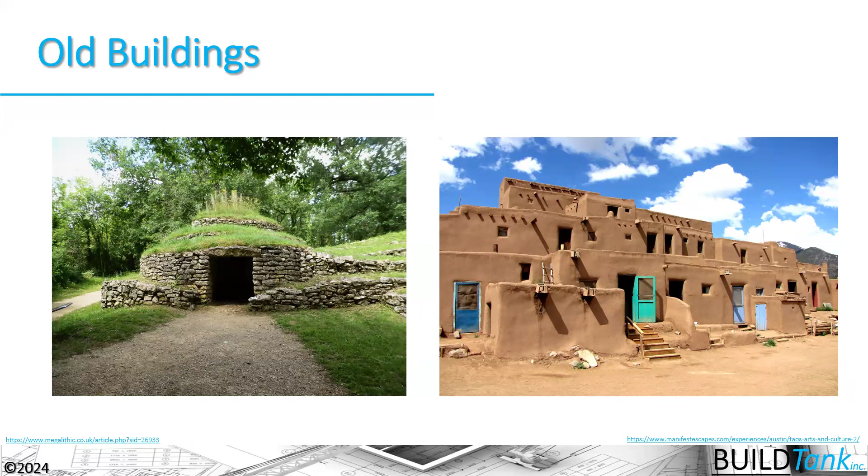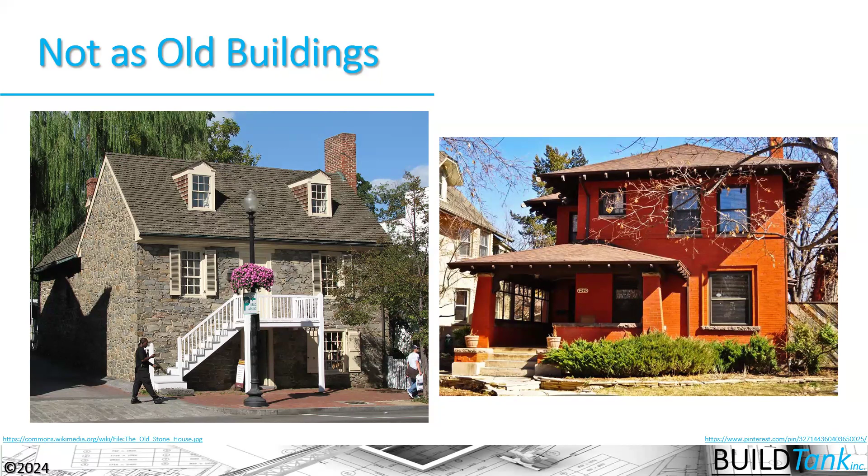And then we transitioned into wood-based construction in the early 1800s, or mid to late 1800s. And once we got to wood-based construction or wood frame construction, we see that things haven't changed that much in terms of the way that we're actually building or the materials that we're using. We moved away from balloon framing to platform framing, but the big thing that's changed is the number of people that are touching our modern day houses.

And that's one of the big reasons why we need to understand building science more and more.

A NAHB study done in 2020 showed that over 300 people are touching a modern day house. Each of those people is segmented into a specific category of what they're doing in that house.

With one builder, we named that person a builder, a superintendent, or a construction manager, who in theory understands how to take that house from foundation all the way through finished carpentry.

So it's really not that difficult to understand why we have some problems with our houses, because we're not thinking about the totality of the house.

We're thinking about just that little segment that we're doing in terms of trade people in that house. And we generally have one person, that construction manager, trying to understand the totality of the process.

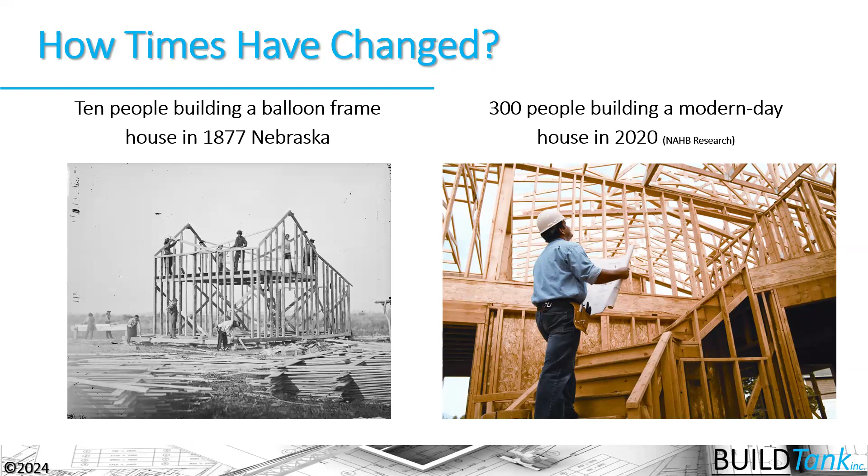So when we're looking at these older houses, we need to ask ourselves, why is this house a 100-year-old house? Why has the Taos Pueblo lasted for over 1,000 years? Often they're drafty, they're uncomfortable, yet they're incredibly durable. Their houses have lasted over time.

And really the main reason for that, and the reason our houses aren't performing as well as they did in the past from a durability perspective, is that our expectations of our houses have changed pretty dramatically.

This 100-year-old house, just because it's drafty and uncomfortable, can be incredibly durable because it has tremendous drying potential. Water is the thing that's going to destroy houses over time.

So we really need to understand the physics of water, and the physics of how air, vapor, bulk water, and energy in terms of heat flow move through our houses.

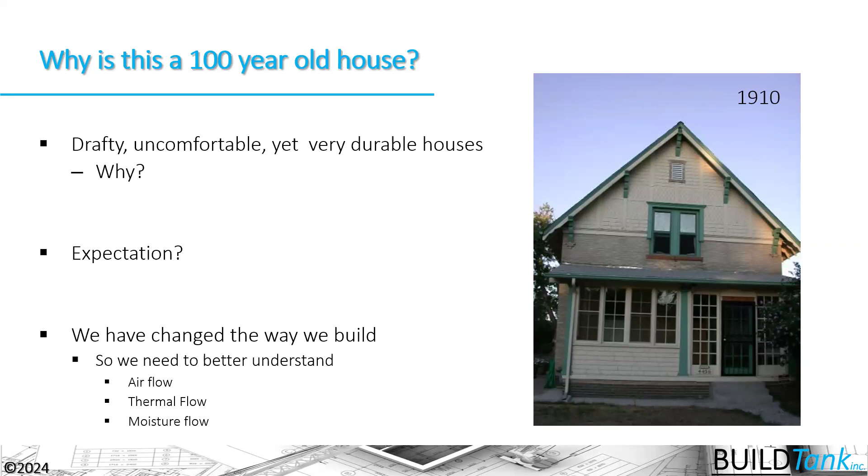So that we can gain control and predictability of the airflow, thermal flow, and moisture flow in our houses. This house is so durable because it's so air leaky, so uncomfortable -- it has the ability to dry if it gets wet.

Now, these expectations are changing whole neighborhoods, whole cities. Older houses are being scraped, new houses are being built, but are we actually meeting people's expectations?

And really, you see the genesis of the code development cycles changing time and time again, because they're trying to achieve the expectations that people have of our houses.

Some simple expectations we can think of, with regards to those changes: take this 1910 house and think about what comfort meant in 1910. Our notion of comfort was quite different.

For example, people were willing to put on a sweater in the wintertime. They might have actually had to do some work in the winter, shoveling coal to heat that house. In the 2020s now, we really want to be able to walk around from room to room and floor to floor and be quote unquote comfortable.

And we want to actually be able to do that in our underwear, let alone having to put on a sweater inside our house to maintain comfort.

Those expectations have fundamentally changed the way that we build our houses, and therefore we have to understand the building science so that we continue to have long-term durability in our homes.

So some of the modern expectations: yeah, we still need that structural integrity. We want fire integrity. We want durable structures. We want healthy environments. We want that comfort.

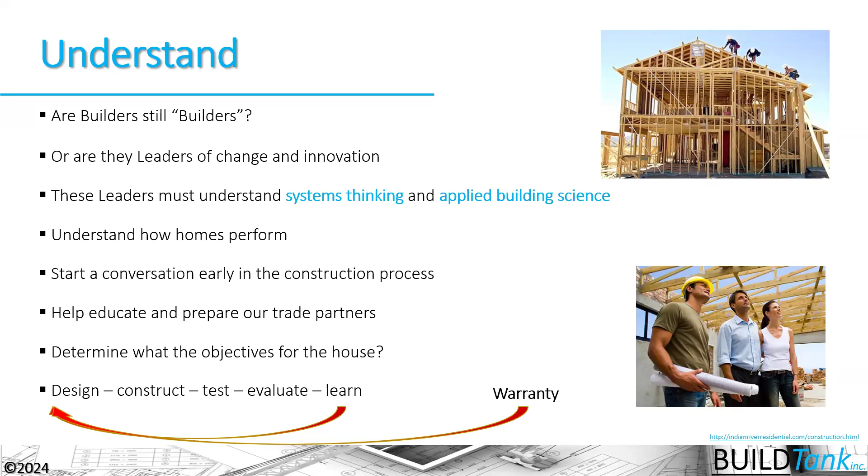We can learn a lot from warranty to change the way that we design and construct so that we do better meet those expectations. But ultimately, what we're talking about is how do we understand the basic building science and how do we apply it in the field to get houses that actually perform.

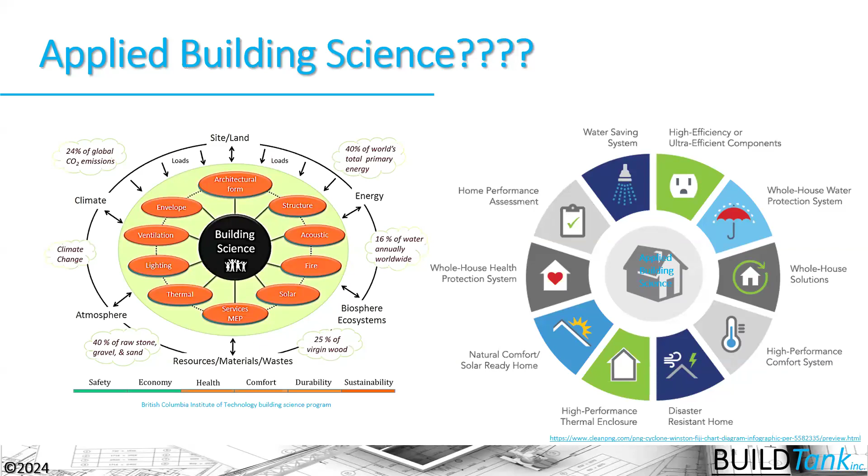Because there's so much here that we need to integrate together. And if we boil this down into a little bit less and talk about the fundamentals, we're talking about how air flows in our house, how heat flows in our house, and how moisture flows in our house, and how do we gain control and predictability of those things so that we get houses that are not only durable, those 100-year-old houses again, but houses that meet the core expectations of the people living in those houses.

We've coined a term recently about high performance buildings. And this diagram here kind of talks about what we're trying to accomplish when we have a highly performing building, a building that is comfortable, healthy, durable, and efficient. And I think we can add the term resiliency as well in our modern world.

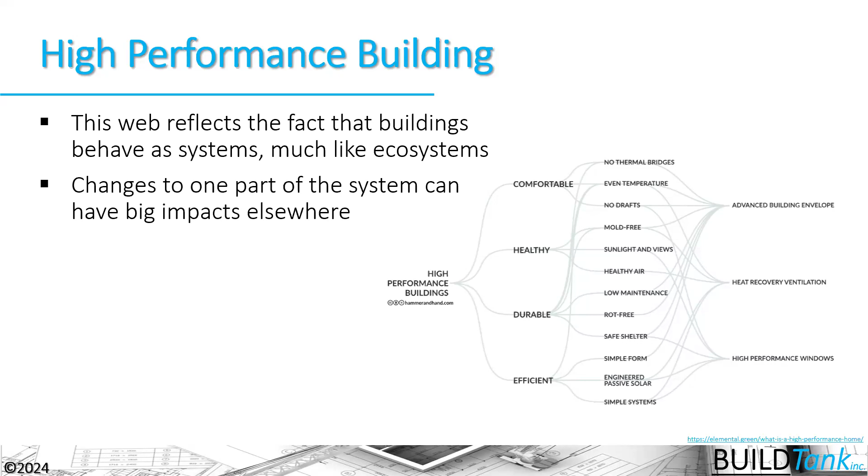After the last fires that we've had here locally in Colorado, we want to be fire resilient. And then the power outage that happened in Texas, we want to be able to reside in our homes over time. So we're seeing severe weather events and other events happening due to climate change and whatnot that are making us think about resiliency as well in this puzzle of things.

So systems thinking has been a key phrase maybe since the industrial revolution in terms of factory lines and production lines, but it's gained speed in housing as well within the last 30 or 40 years. And really the key term there when we think about systems thinking is not just moving from the specific framer or insulator and thinking in this more holistic approach, but understanding this word synergy, where two or more things come together to achieve something that's greater than what they could achieve on their own.

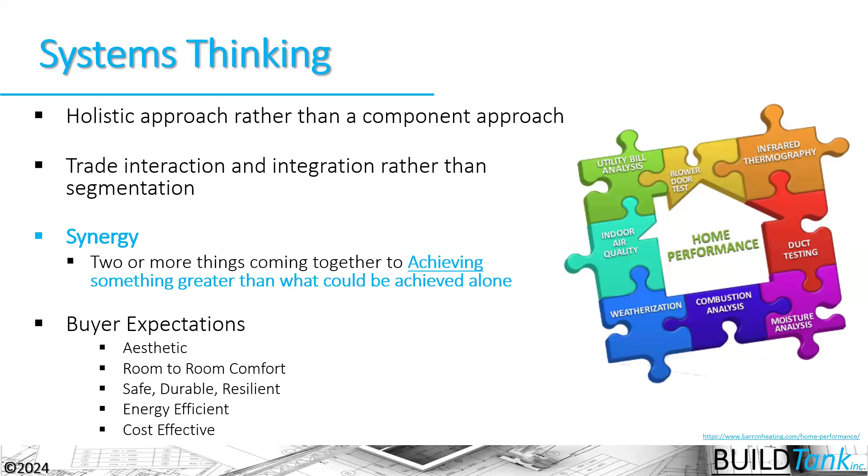So again, the only way to meet these buyers' expectations, the people that are actually living in our houses, is to understand the synergy between insulation and air barriers, between ventilation and house tightness, between moisture management and long-term durability. All of these things come together, and the systematic approach helps us do that. So two or more things coming together.

So we can think of it in a simple way as insulation and an air barrier coming together to control heat flow, especially when you have fibrous insulation and you're trying to control the air pockets inside that fiber. But in reality, when we bring insulation and air barriers together, we're getting more than just control of heat flow. We're also beginning to get more control of airflow in that house. And we're also getting more moisture flow control and predictability, and better and improved indoor air quality.

So just bringing those two things together, there's this synergistic relationship that is giving us 4 or 5 or 6 or other interactions there that are giving us these qualities, and helping us meet those expectations that people have in their houses.

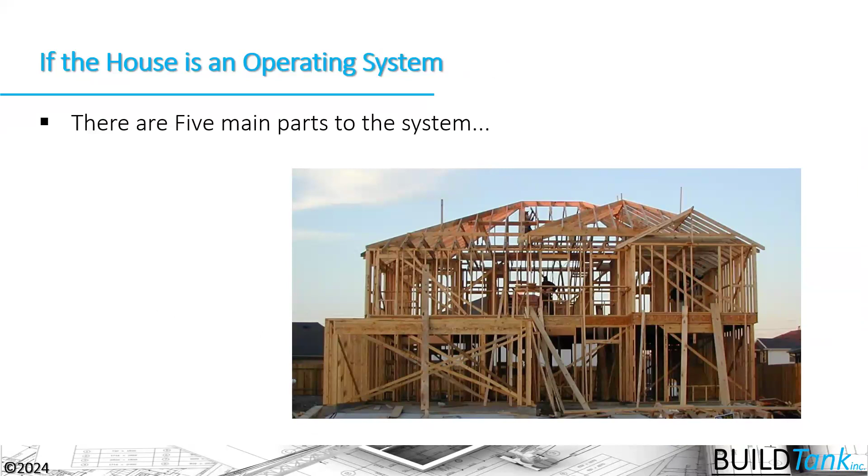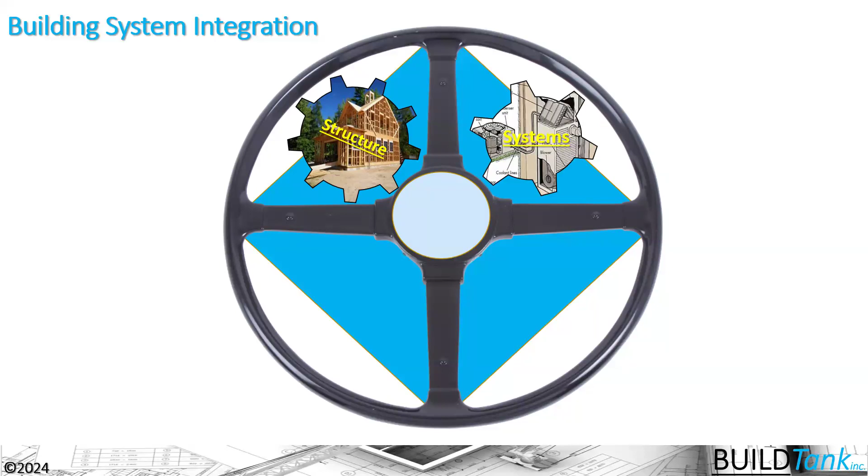So when we start digging in a little bit more, there are kind of these 5 main parts to the system that we need to address and understand the synergies that are happening with these systems. We have the basic structure of the house. We have the systems, the mechanical systems, the HVAC, the plumbing, the lighting systems in our houses. We have the enclosure of that house to control moisture and heat and energy moving through that enclosure. And then we have the specific climate that house is in.

And then we have this kind of wild card, the wild card being the people in that house. And we're going to take these different systems integrations here, and we're going to plop them into, again, that specific climate here. And that climate is defined by the IECC climate zone map here.

In Colorado, we're in dry climate zone B. You can see the dark line separating the dry climate zones from the moist climate zones. Colorado specifically has one of the largest varieties of climate zones within our state, from climate zone 4B to climate zone 7 and 8 up in Leadville and in our mountain areas.

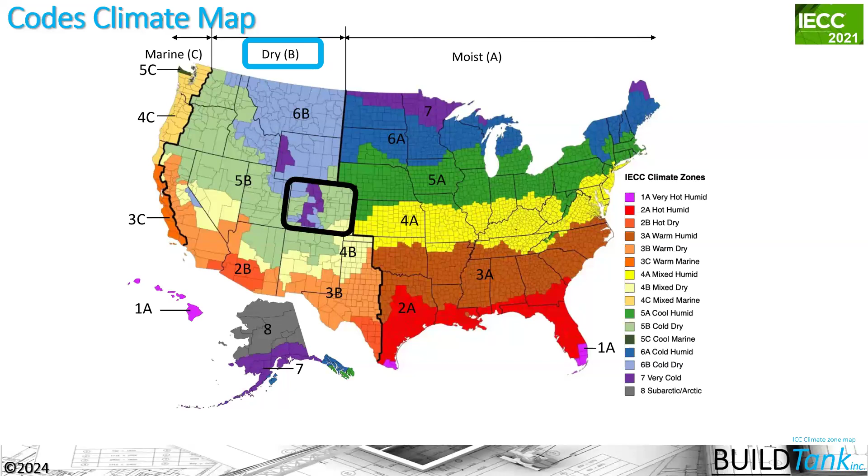But the majority of Colorado on the Front Range plains here is in climate zone 5B. We just have to recognize that because the code asks us to do things slightly different in climate zone 5B, the dry climate zone, versus 5A, the moist climate zone. So we need to understand the building science and how we're going to apply that building science on these homes.

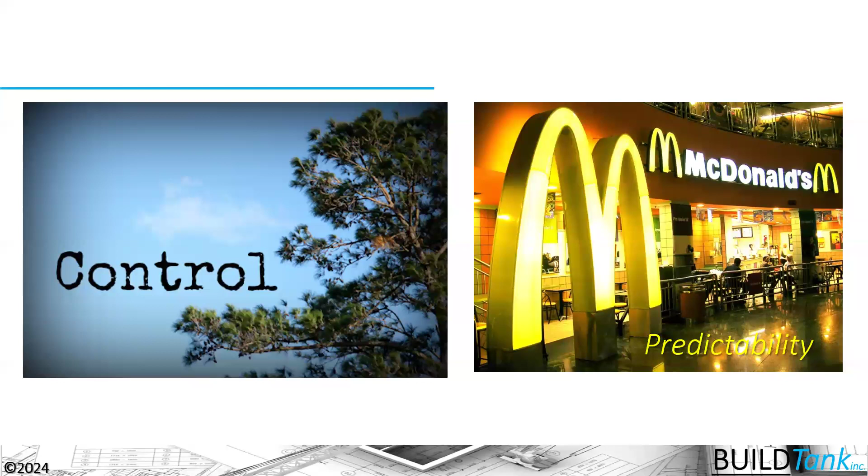So it ultimately comes down, when we're talking about building science, to gaining control of airflow, moisture flow, and thermal flow, and also gaining predictability. I like to use McDonald's as a meme for predictability, because if I'm in Paris, France, or Los Angeles, or Denver, Colorado, and I get a Big Mac, I know exactly what I'm going to get in any of those locations, and how I'm going to feel afterwards. It's so predictable that that's what we want to translate into our homes, gaining that control and predictability throughout our houses—predictable performance, predictable flow of energy, predictable vapor management, and all those things.

Building science over the last several years has kind of consolidated all these concepts into understanding thermal flow, vapor flow, airflow, and bulk water management. Some people will put these in a different order, but I'm putting them in this order because that's kind of how they're addressed with regards to the energy code. So we're going to look at these different layers, but we're going to start with the intent of the IECC.

The intent statement of the IECC is important because if you break it into its three components, you can kind of see building science wrapped into them.

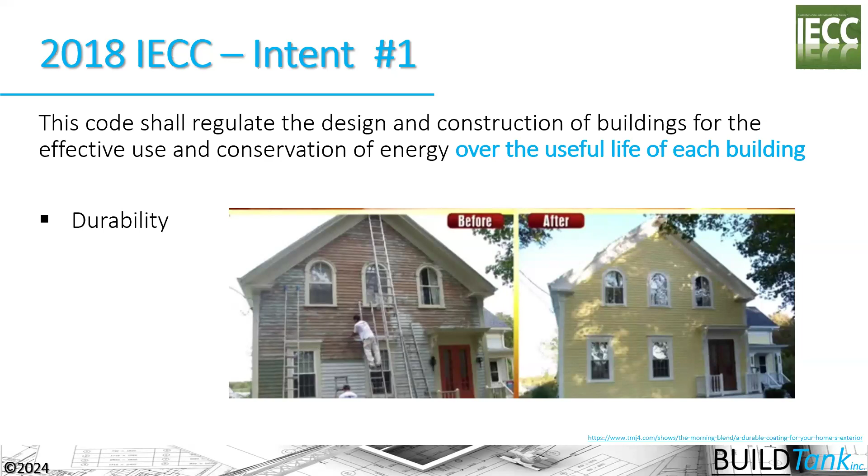The first part of the intent statement says that the code shall regulate the design and construction of buildings for the effective use and conservation of energy over the useful life of the building. It's really that section that's getting us to understand that the code is trying to ensure we have long-term durability in our houses. Now, obviously it's the energy code, so comfort is kind of implied, and energy efficiency and cost of operation are kind of implied in the intent statement, though not specifically talked about there.

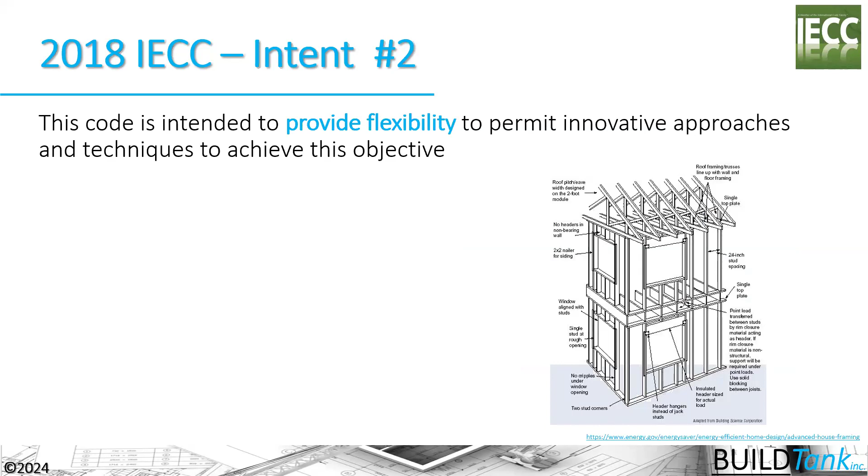The second part of the intent statement says this code is intended to provide flexibility to permit innovative approaches and techniques to achieve this objective. The big part here is to provide flexibility. I like to equate this to a statement from the Dalai Lama, where he says we need to learn the rules so that we know how to break them properly. In that way, it's telling me that we need to dive into the language of the code book itself, because it's giving us tons of options. It's not saying we have to do things in one way, but that we need to do things in a variety of different ways to achieve one result.

The result being a house that meets the intent of the code, that has a quantifiable amount of energy use in that house if it's built to that specific code. And we should have a quantifiable amount of performance in that house from a comfort perspective, a durability perspective, and so forth.

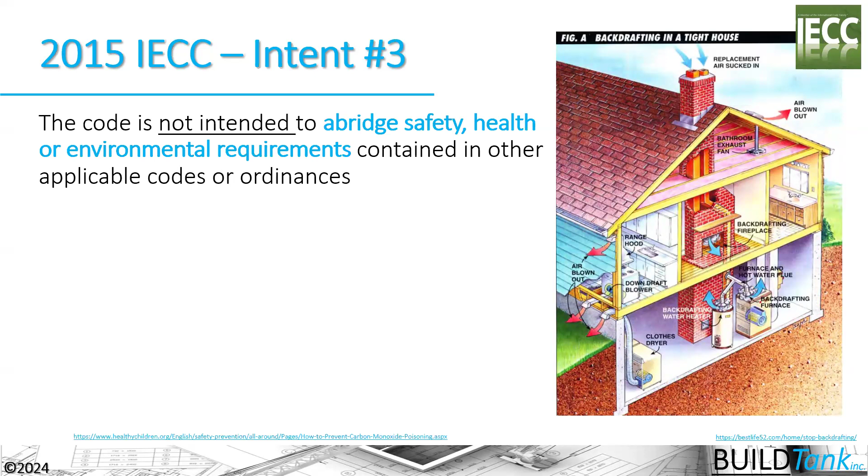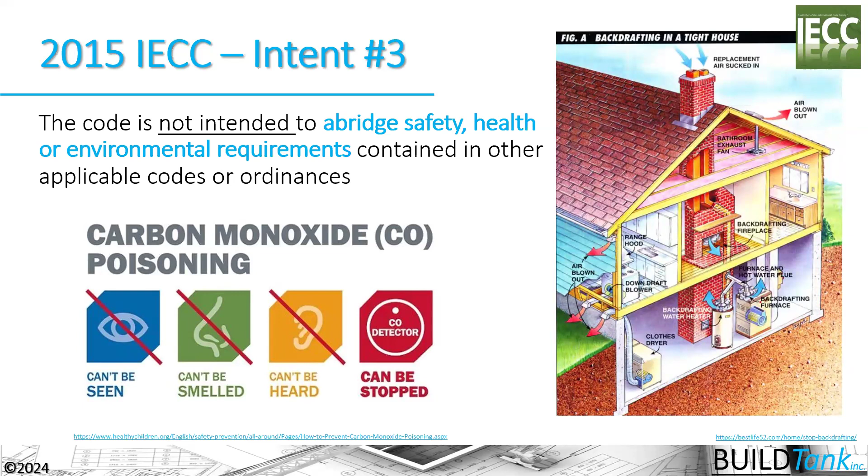The last intent statement says the code is not intended to abridge safety, health, or environmental requirements contained in other applicable codes or ordinances. But we also need to realize the link between the IECC and health, safety, and durability in our houses—from carbon monoxide poisonings and not backdrafting atmospherically vented appliances, to understanding the pressure balances in our houses, to understanding that health and safety also have to deal with controlling the building thermal envelope so we can keep cool and warm and safe inside that house.

We don't want to continue to have situations where people are living in their houses and actually dying inside from being either too cold or too hot. And that is happening in our country right now, because we're not gaining that control and predictability of the building thermal envelope of that house. So we want to maintain shelter.

We want to maintain durability. We want to understand the cost that's associated with that. But we necessarily don't want to focus on first costs, because first costs take us away from understanding how all of these things integrate together to achieve what we're ultimately trying to achieve here.

So the building science is primarily wrapped into Chapter 4 of the IECC, whether it's the 2021 or the 2015. Ultimately, the code is trying to gain predictability and control by building our houses tight, by having a sound building thermal envelope, and then by ventilating the house correctly in accordance to the code there. And if we do all those things, we get control and predictability of thermal flow, airflow, and moisture flow.

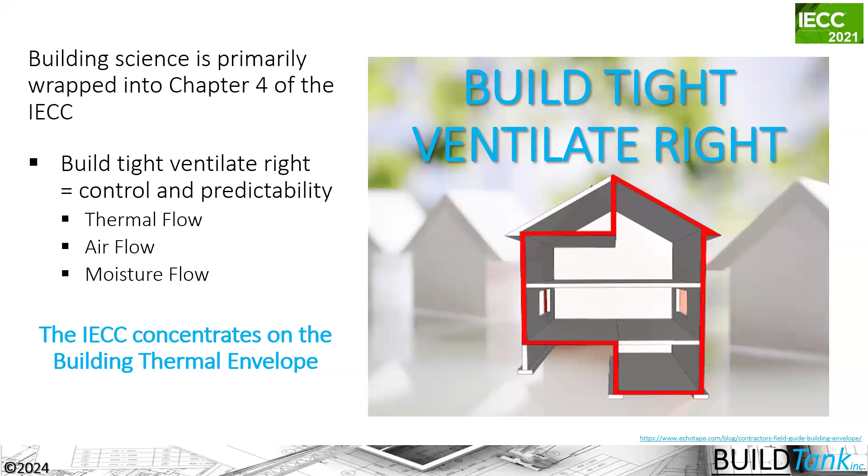Now, from my perspective, the IECC maybe concentrates a little bit too much on the building thermal envelope and not on other parts of the building assembly. So we always have to understand the relationship and the synergy that's gotten between the energy code and the IRC, the building code, as well, to ensure that we're getting a house that ultimately performs here. And so we'll talk a little bit about the IRC here and how these two codes, as a family of codes, work together to achieve our ultimate goals here.

So the International Energy Conservation Codes have a number of requirements. And in the 2021 IECC, they got rid of this confusing word mandatory, and basically everything is just a requirement. So at its core, if you're not using the 2021 IECC, you have to look at prescriptive and mandatory requirements and understand that if there are installation requirements in the prescriptive section, those are also required regardless of the compliance pathway that you choose. And that's the realization that we came to in the 2021 IECC, is that there aren't prescriptive requirements and mandatory requirements.

So they're just requirements for how you install things so that you get the synergies from the building science of these things that we're installing in our building thermal envelope to control thermal flow, in our vapor retarders to control vapor, water that's moving through our buildings, and so forth and so on here. Now, again, you have to fulfill those requirements regardless of the compliance pathways. And this is where the real flexibility is brought into the code from that intent statement.

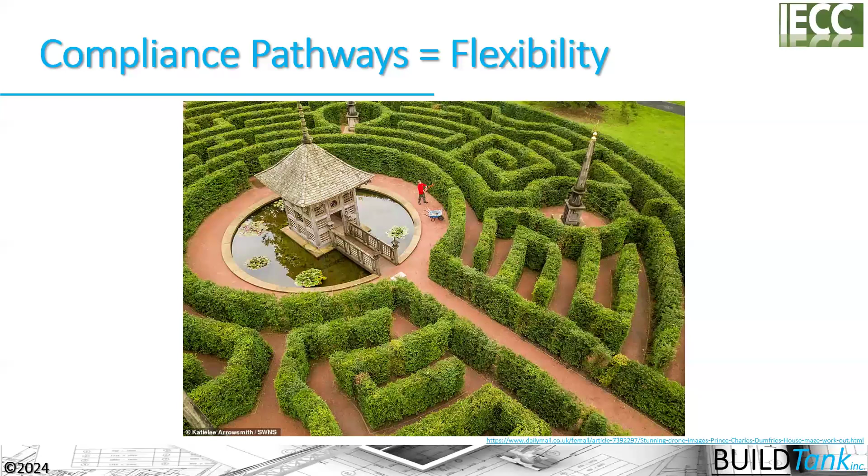So we have these different compliance options in our codes here, and you don't really get the flexibility until you move to either the prescriptive UA compliance path, the total building performance, or the energy rating index pathways in conjunction with these additional energy efficiency packages, because these pathways provide us the ability to do a software energy model on the house.

Now, you can do a very simple model using the prescriptive UA compliance, a ResCheck type model. Remember that ResCheck is the name of the software, not the name of the compliance option path there. Or you can do a more sophisticated energy model using the total building performance or the energy rating index pathway there.

But the whole value of energy modeling is that you can fail fast and you can succeed even faster, meaning that I can demonstrate how the house is going to fail or not meet the intent of the code quickly, and I can get to a cost-effective way of meeting the requirements of the code in a very fast manner there that's going to speed the process, but also figure out how we're going to do it in the most cost-effective way.

Now, what energy modeling does in its simplistic kind of terms is that it's a software that creates a reference home, which the home that you're rating is compared to, and you compare the reference home to the home that you're actually rating. Now, the big thing about the reference home is that it's a geometric twin of the house that we're actually wanting to understand how it's going to perform. So we do a takeoff in the software, we enter the dimensions into the software of that house, and it creates two houses that are geometric twins of each other.

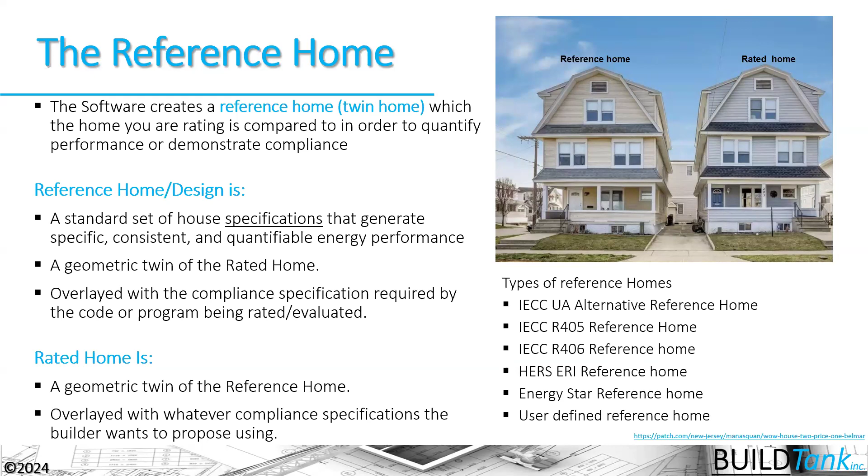We're going to meet the intent of the code here. So to explain that in a different way, we have two houses inside the software that are geometric twins of each other. We have the builder's desired house compared to the reference home.

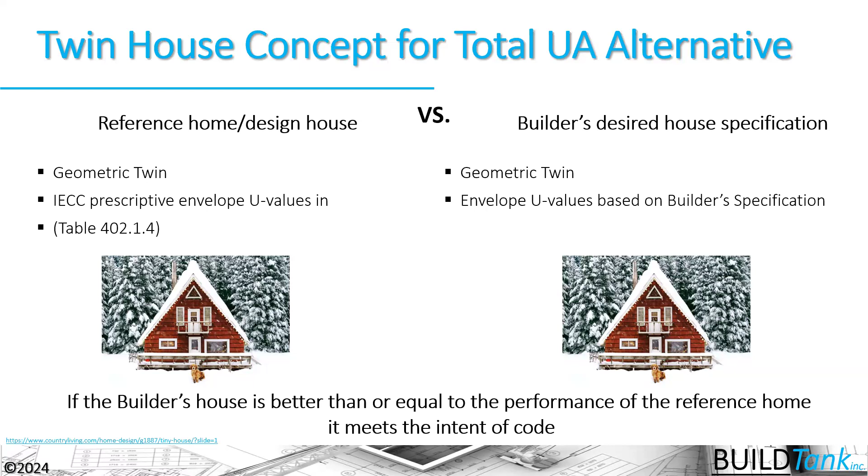And the reference home is created by the IECC prescriptive envelope U values and requirements that are in table R402.1.4. We then take whatever the builder's specifications are for that house, and we input that into the software. That way we have two houses that are geometrically the same, but have different thermal envelope characteristics. Now we can compare the builder's house to the reference home, and if the builder's house has better or equal performance to the reference home, it's going to meet the intent of the code.

And that, in its simplicity, is what the energy modeling compliance approaches allow us to do, because ultimately it allows us to do what we call a trade-off. A trade-off says that if we're going to put something more in one assembly, then I can put something less in another. So it increases the flexibility in terms of choosing how I'm going to put together my building thermal envelope, my building assemblies, the core wall assembly, roof assembly, foundation assembly. How am I going to do that in the most cost-effective way to get the level of performance I'm trying to achieve? Whether that's the IECC or a passive house level, they're going through an energy model to figure out the best way to put those things together.

It means you have to move from the prescriptive approach to a performance approach to do this trade-off. So if I'm going to put R38 in my attic, I'm putting less there, so I have to do something more in other assemblies. Maybe I'm installing better windows than the code requires. Maybe I'm building my houses tighter than the 3 air changes the code requires. And maybe I've reduced duct leakage to the outdoors. Those three things, or maybe just one of them, might balance the equation so I still have a house that meets the intent and energy performance of the code, making that trade-off of less insulation in the attic in the most cost-effective way possible.

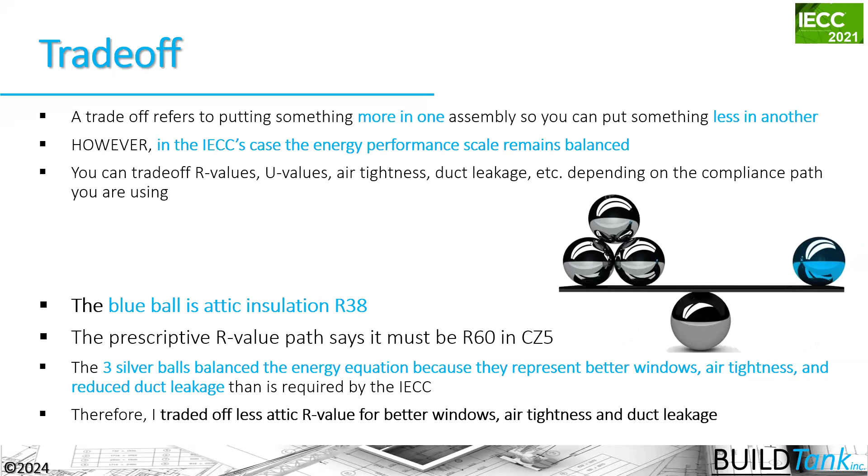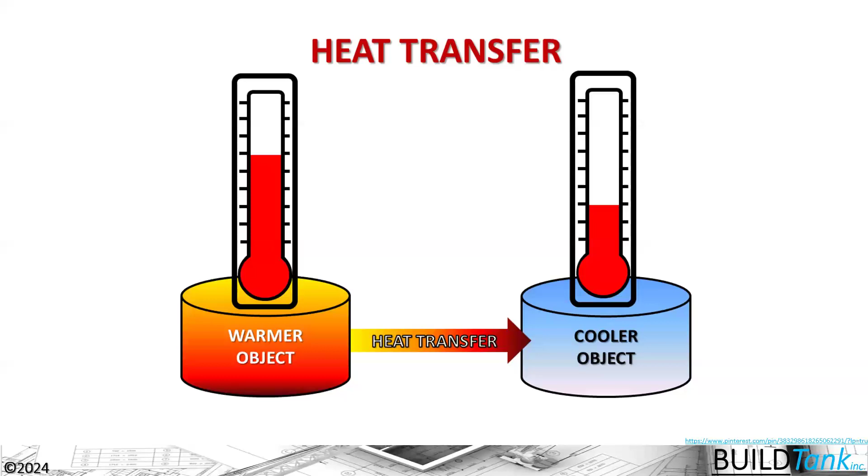So we need to think about those trade-offs and how they work, and then how we're going to get control of our building thermal envelope. The building science here is that we need to understand how heat flows. Heat flows from a warm object to a cold object, or energy flows from a warm object to a cold object. And it can only do that if we understand what delta T is, the temperature difference across the assembly, so we know which direction the energy is flowing.

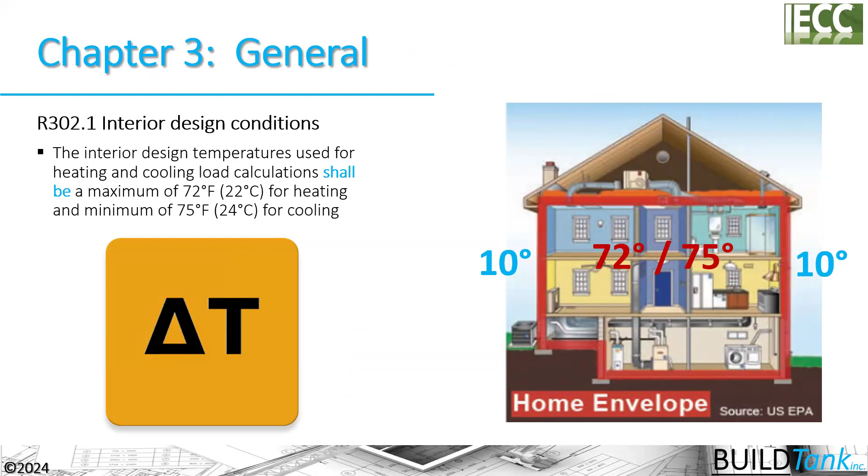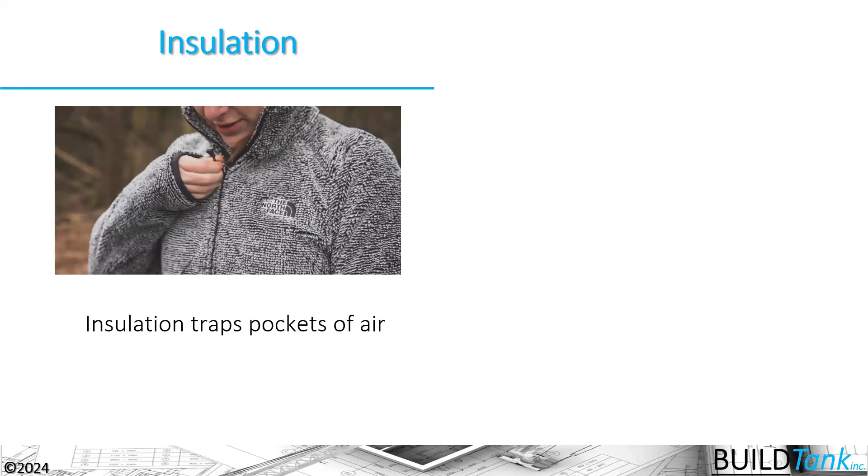The code tells us what our design temperatures have to be in the wintertime and summertime, so we know which way the energy is flowing in each season. It tells us we have to install insulation in our building thermal envelope, and insulation ultimately traps a pocket of air. It's that stagnant pocket of air that ensures we can reduce energy flow from higher concentrations to lower concentrations, which means we have to have a thermal layer, but we also have to have an air barrier.

It works the same way as our clothes. We have a fleece jacket trapping a pocket of air like a fiberglass batt. We have this Arc'teryx nylon shell over that. The nylon shell is the air barrier, just like the air barrier we're going to install, so we can get that stagnant pocket of air and reduce the flow of energy from higher concentrations to lower concentrations.

The other thing we need to understand is the synergies of things here. Our HVAC system is designed before our house is built, and it's dependent on the specifications for that building thermal envelope.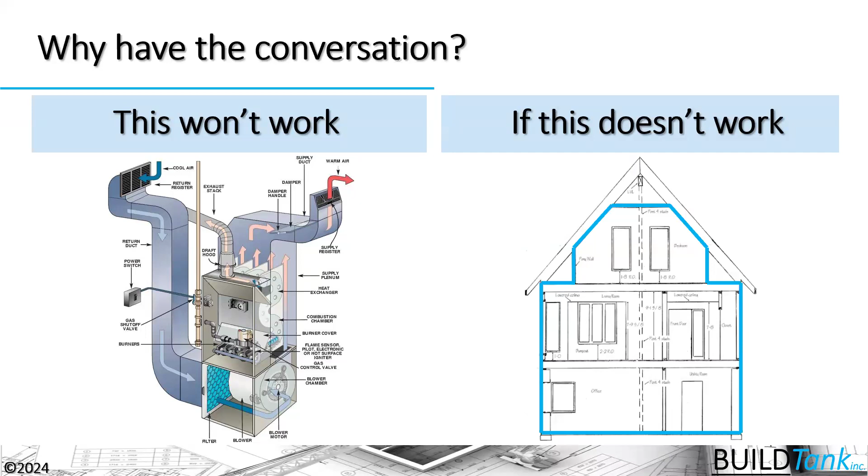If we don't execute that building thermal envelope, our design is not going to work. Yet we often don't go back and tweak the design to ensure it matches the building thermal envelope we actually achieved, especially when we don't achieve the R value. Maybe the batts have been installed poorly and we're not actually achieving an R20 in the wall assembly. That might mean we need a slightly bigger HVAC system to make that work. So we need to carry out the work so that we get the synergy from these assemblies working together.

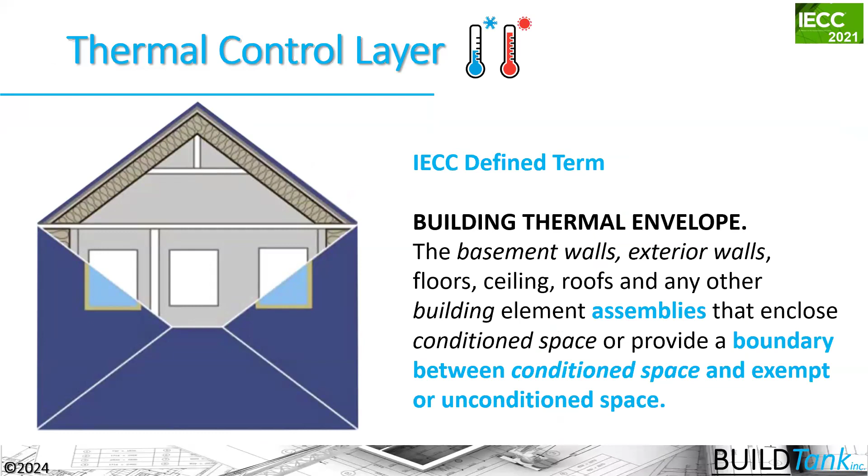The IECC defines the building thermal envelope specifically as an assembly of things that create a boundary condition between conditioned space and unconditioned space. The code tells us we have to depict that on our building thermal envelope so it's not just the knowledge of the architect and potentially the builder, but the trade partners in the field understand where that boundary is happening and how we're going to ensure we get that separation between conditioned and unconditioned space, and what materials we're using to reduce heat or thermal flow through those assemblies.

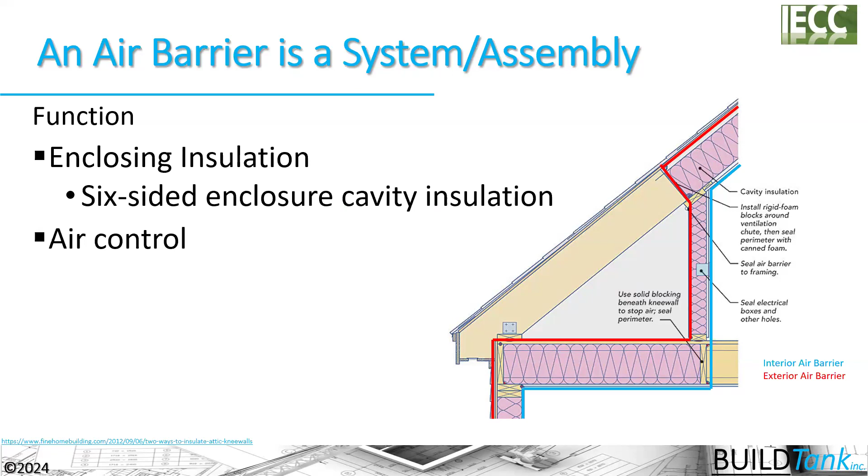The function of the air barrier system is to enclose the insulation - that's our thermal envelope insulation - so that we get enclosed insulation cavities that trap those pockets of air. So we get air control, thermal control, and ultimately better moisture control in our assemblies. It's crucial that we understand how the code defines the building thermal envelope and our air barrier systems, because they're really using a belts and suspenders approach.

A lot of people think about air barriers as one plane in our building assembly, either on the outside with a weather-resistant barrier, or on the inside with our drywall. The code is saying it's an assembly of things. So we get that synergy effect if we understand that our primary interior air barrier is drywall and our primary exterior air barrier is our exterior sheathing, and they work together to gain control and predictability of airflow through our houses.

Now, if I choose to use zip sheathing and say that's my primary air barrier, it still doesn't negate the fact that the continuity of the drywall on the inside is going to be a belt and suspenders approach, helping improve the overall air tightness and control and predictability that we get in our houses.

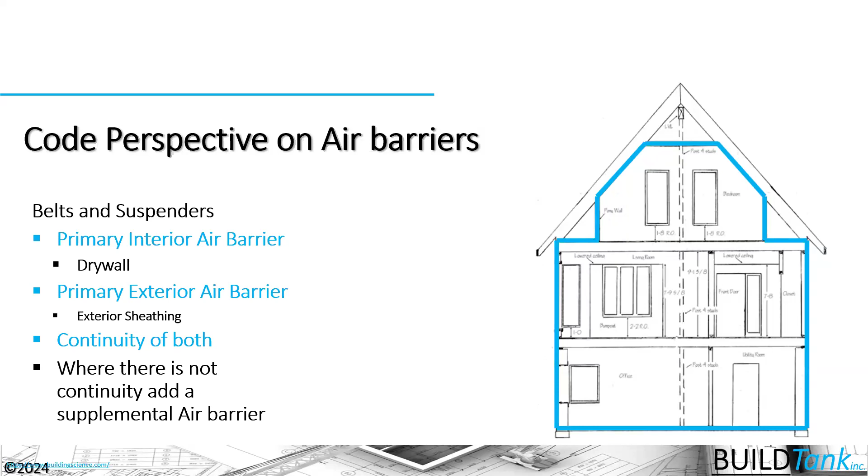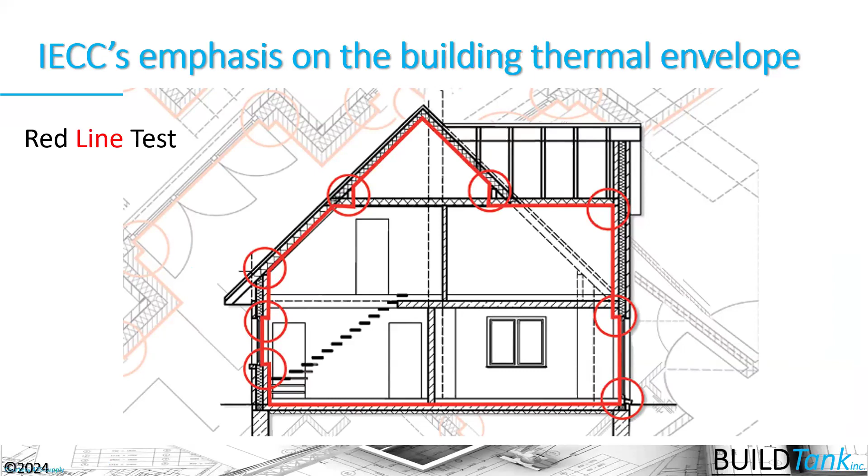So we want to understand these as approaches. And the code is telling us to depict that air barrier, that building thermal envelope, all the way around our houses. In particular, we need to pay special attention where different assemblies come together - where the roof joins the wall, the wall joins the floor system, and the floor system attaches to the foundation. Those are the key areas we're really concerned about from an airflow and thermal flow perspective.

The code also defines the base R values and U values that we have to put into our building thermal envelope. Remember that they sometimes make mistakes when they print the code books, so you need to go to the errata to get the right R values and U values sometimes - that's what happened in the 2021 IECC.

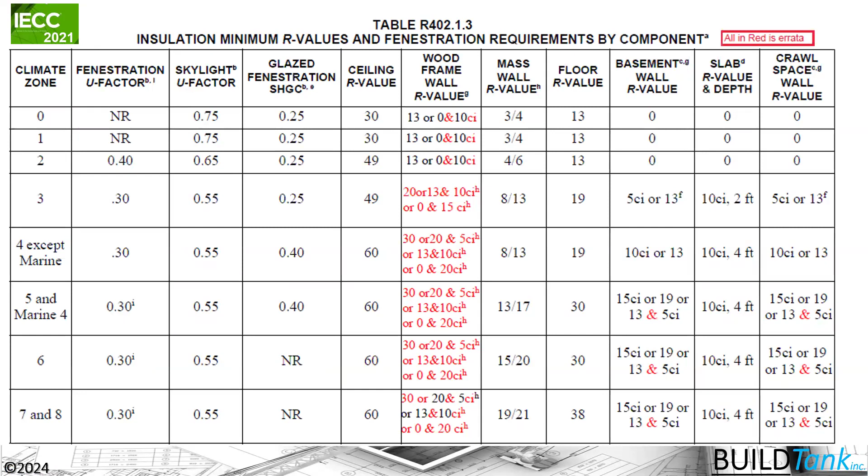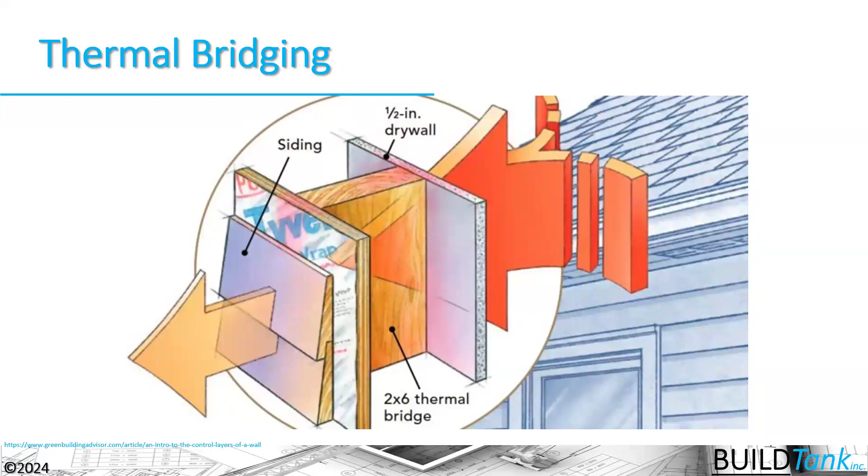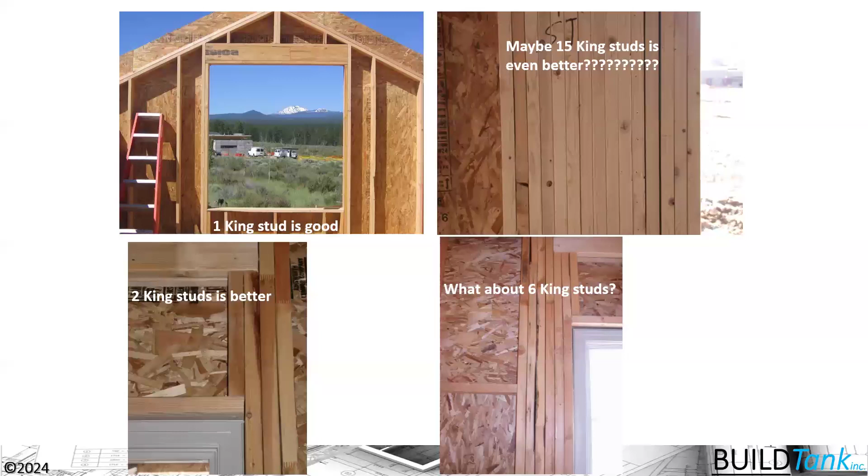The code is also telling us to reduce thermal bridging, because the envelope isn't continuous in essence. It's starting to ask us to put continuous insulation on the houses to reduce thermal bridging, because we have a tendency to design it rightly with one king stud, which is great, but the framer might decide we need two king studs, because if one is good, two is better. And if two is good, six is better. And if six is good, maybe 15 would be even better. So we're just creating opportunities where we have less insulation, more thermal bridging, and places where condensation is going to gain the upper hand.

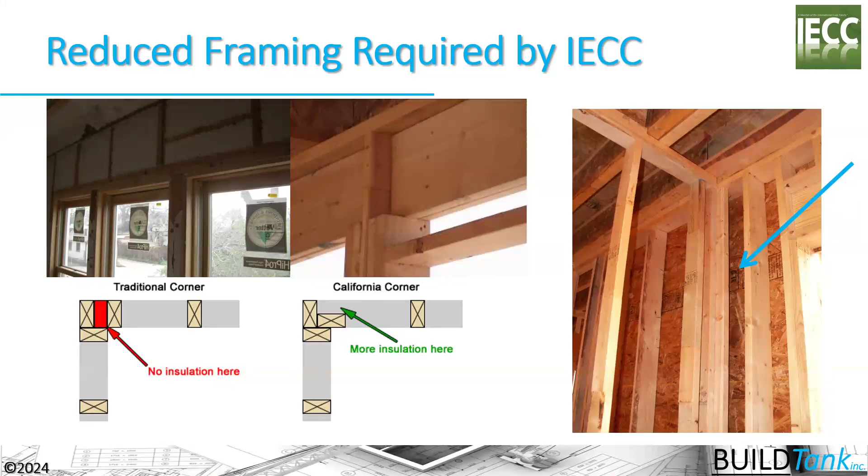We see that the code has requirements where we have to insulate our headers and our corners and reduce the thermal bridging happening in our houses. This also means we not only need to address the framing, but we need to address our cavities and how we're going to insulate those cavities, following the manufacturer instructions and the additional insulation and installation instructions embodied in the code, to ensure we get cavities that are insulated, and insulated right.

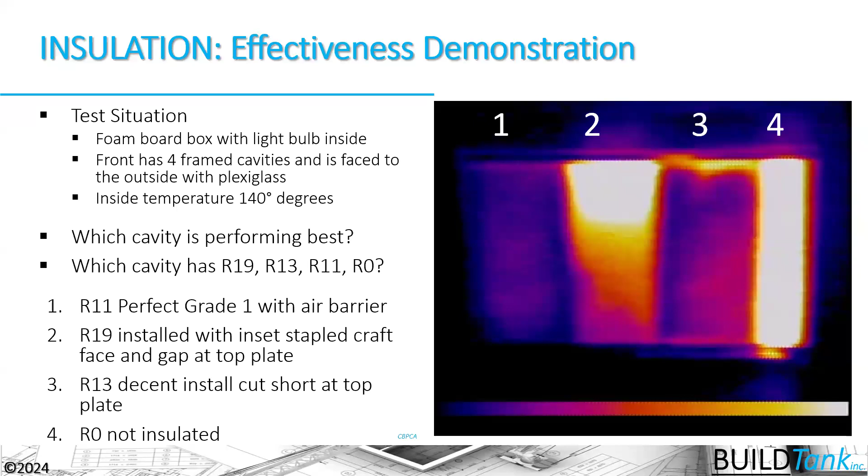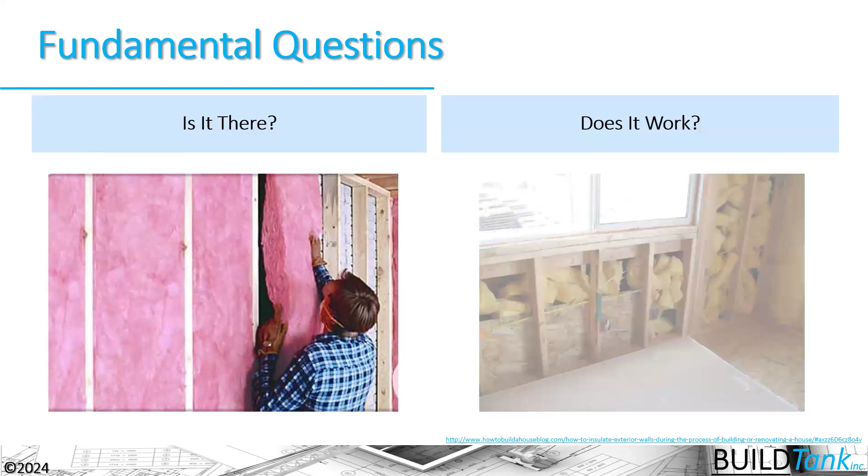If you look at this slide, you might be surprised that cavity number 2 has the highest R-value, but it doesn't have the best performance at all. So we want to make sure things are installed properly, which gets us to the fundamental question we should ask as we build or inspect houses: not only is the insulation there, but has it been installed so it actually works and functions in our houses.

Now we're going to move on to our vapor control layer from our thermal control layer. The vapor control layer is the component or components designed and installed in assembly to control the movement of water into an assembly by the process of vapor diffusion. So we're not talking about the movement of water into our assemblies that's being carried with air.

It turns out that the code fixates on vapor control, using a vapor retarder to control that vapor movement into our assemblies, versus the movement of water vapor into our assemblies by air. So we need to not only think about the vapor retarder, but also the air barrier and potentially the water resistive barrier when we're thinking about water vapor transport.

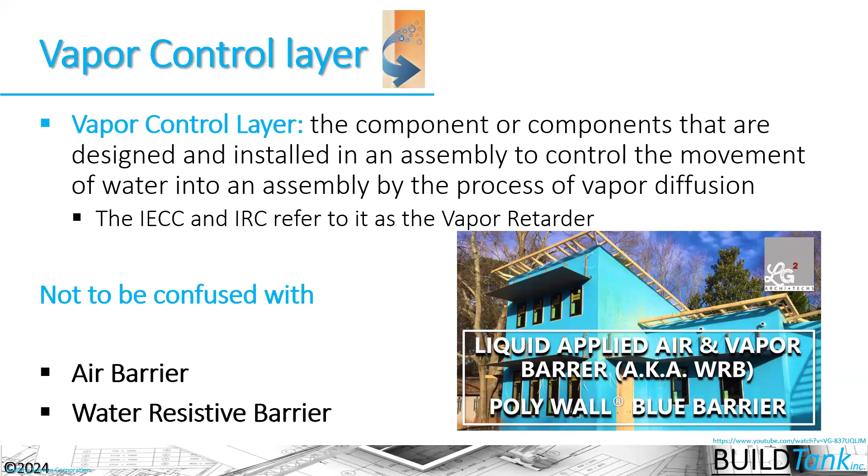The reason is they've done a number of experiments over time to determine that the flow of vapor directly through the pores of our drywall, from higher concentrations in our climate zone—we're talking about climate zone 5 here, where we generally have higher moisture content inside our houses versus outside—is a very slow transport mechanism, this notion of diffusion of water vapor through the pores of drywall from higher concentrations to lower concentrations.

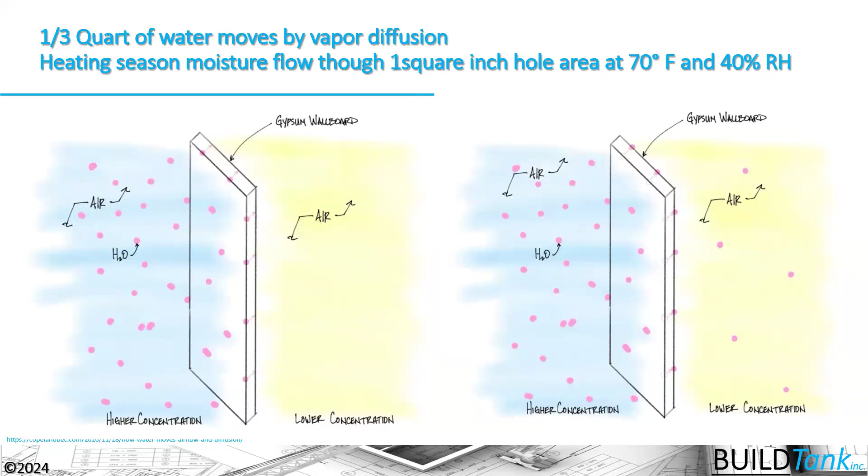Versus when we introduce 1 square inch of hole area, about the size of the net free area of an electrical outlet, we see that we get 30 quarts of water moving into that wall assembly over the course of a heating season, versus a third of a quart of water moving through that same drywall from the process of diffusion.

So what this tells me is that building science has shown time and time again that we shouldn't necessarily concentrate on vapor retarders as much as house tightness, to ensure water vapor isn't getting into our assemblies through outlets and other holes in our building assemblies, ultimately creating condensation points or problems inside of our assemblies.

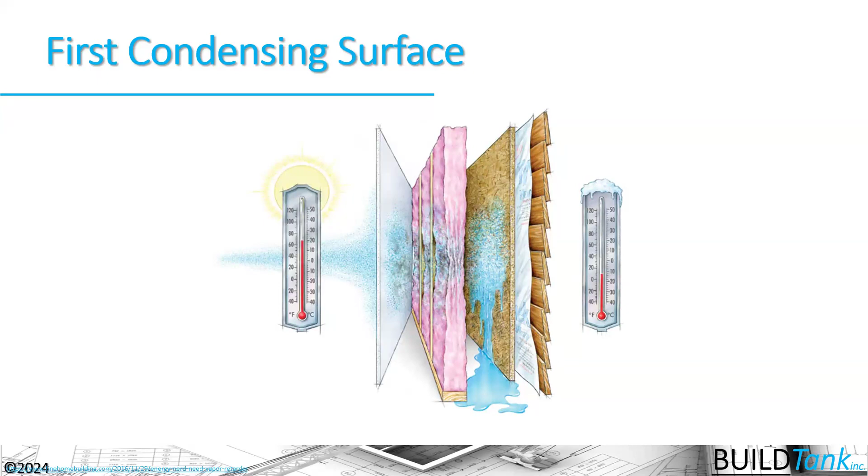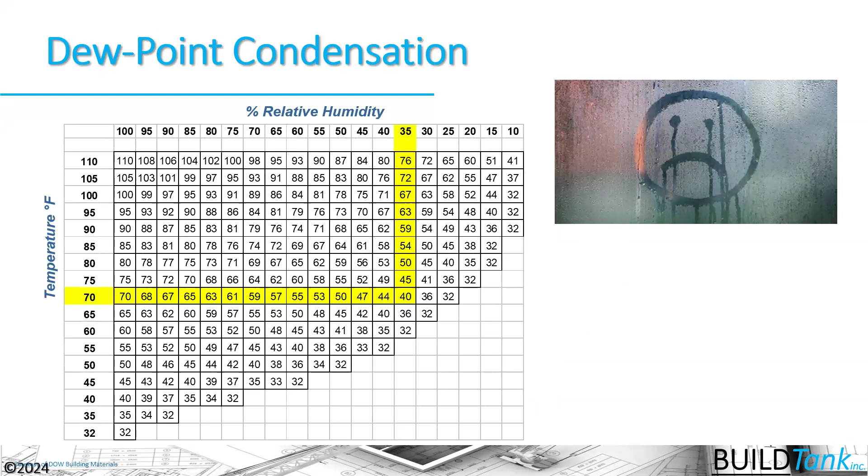Because if moisture in its water vapor state gets into that assembly and it ultimately touches a cold surface, it's going to condense. And it turns out that cold surface doesn't have to be that cold. If we have 35% relative humidity in our house at 70 degrees, and we touch a surface that's at 40 degrees, we're going to get condensation inside that assembly.

So anytime it's cold outside, like as cold as it is today, in the 20s maybe out there, we're going to get condensation. So we need to stop the bulk of the water vapor from getting into the assembly in the first place, which means we want an airtight assembly. And then we want to build assemblies that have forgiveness, that have drying potential, so we don't trap that moisture. If it's going to diffuse into the assembly, we want it to have the ability to diffuse out, which we call drying potential. So we want high permeability rather than low permeability in our assemblies.

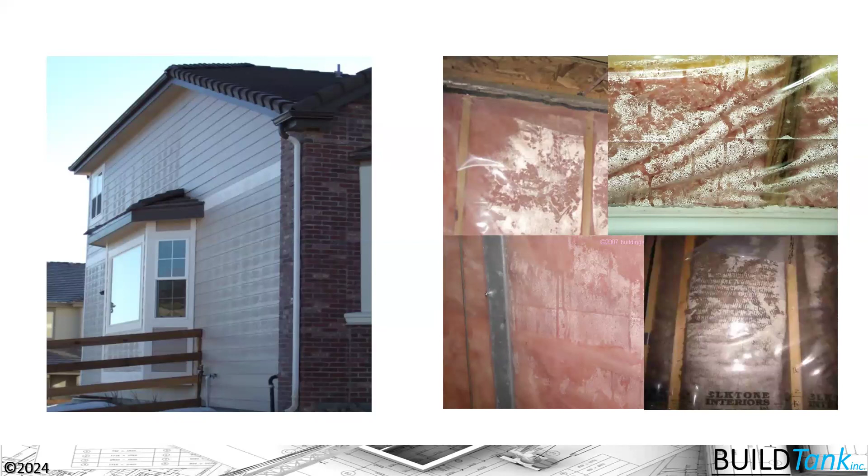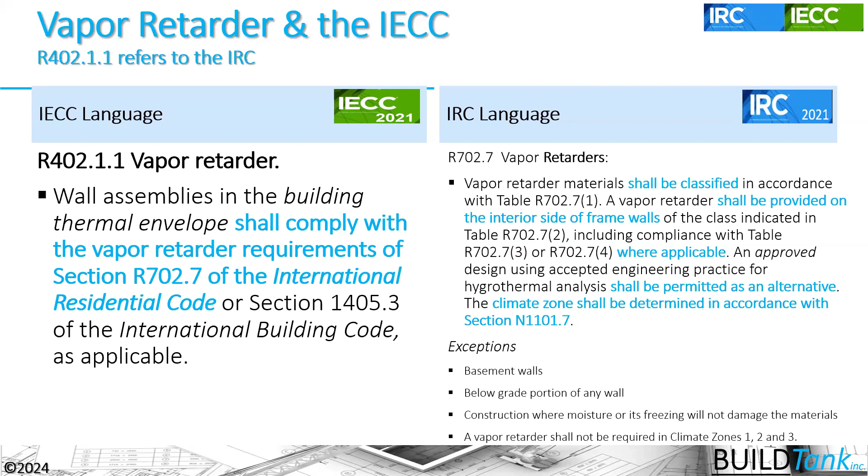You'll see that the IRC vapor management or vapor retarder sections, in the R702.7 section of the IRC, has changed pretty dramatically to allow more and more class 2 and 3 vapor retarders, with class 3 vapor retarders being basically latex paint on our houses. You'll need to go to that section of the IRC to understand the vapor retarders, because we simply don't have time today to do it.

But the other part of it is blower door testing to confirm that our houses are airtight and that our assemblies are tighter, so that less vapor is moving into our assemblies with the air leakage that's happening in our houses. So we need to move to air control. There are a variety of ways to control airflow, and the air barrier is the thing. Remember the belt and suspenders approach, with our primary interior and exterior air barrier, and getting continuity of both those systems.

So when I install that zip sheathing again on the outside, yeah, it might be my true primary air barrier on the outside, but I need to make sure that we have the continuity of not just that zip sheathing on the outside, but continuity of the drywall on the inside, to ensure that I have an assembly approach that's going to work as a belts and suspenders around our house.

So continuity is a key air barrier attribute. Strength is a key air barrier attribute. That's why we don't want to necessarily rely on our poly that we've installed as a vapor retarder to also be our air barrier. Durability, how long is our air barrier going to last? Remember the intent statement of the code. We want those 50, 100-year-old houses. We don't want houses to fail in the first 5 to 10 years.

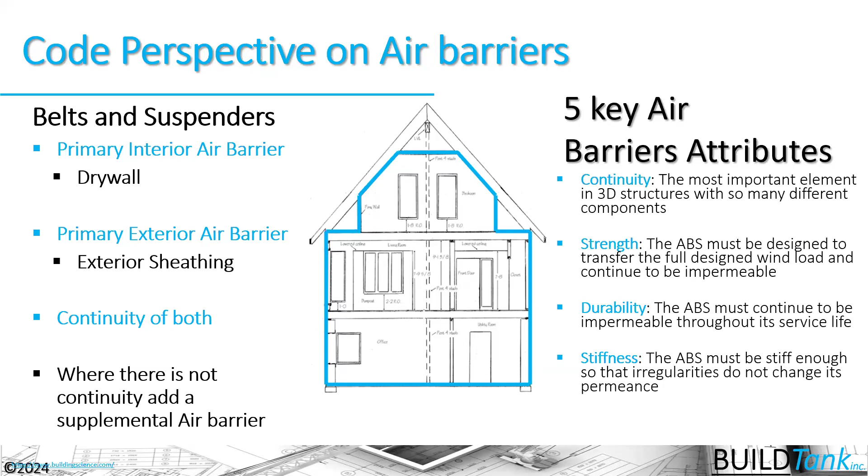I believe that air barriers that are stiff are much easier to install, and they work a lot better than any flexible type of air barrier there. However, I do admit that Passive House is showing that there are a new host of vapor retarder and air barrier materials that can be installed well that are flexible there. But again, it's all in the installation.

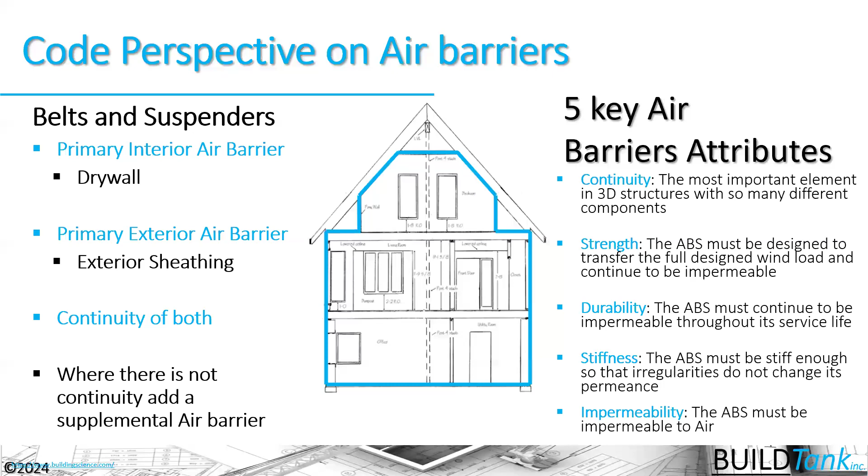And ultimately, when we talk about an air barrier, it has to be impermeable to airflow. So we're stopping the majority of that moisture that's going to get into our assemblies because of the impermeability of the air barrier rather than the permeability from a moisture perspective of our vapor retarders or our other assemblies here.

So the code also defines continuous air barriers as a combination or assembly of things here. And the air barrier itself, one or more materials joined together. So again, continuity is a huge part of the air barrier assembly there. We want to make sure that it's working right.

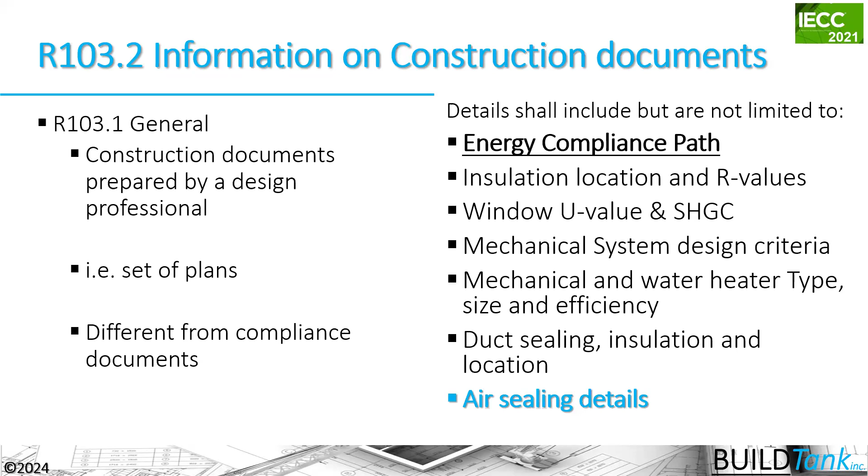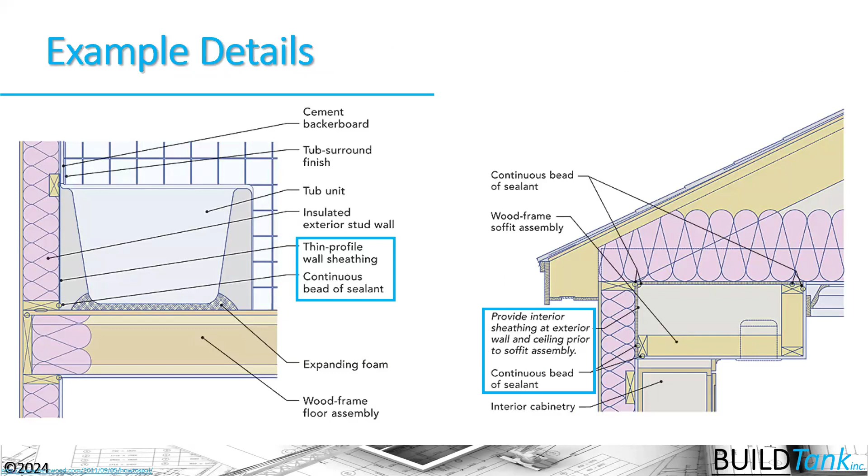The code also tells us that we have to provide assembly details to ensure that these air barrier details are carried out in the field here. So air barrier details are dealing with how do we get the continuity in specific assemblies, like behind the air barrier behind the tub, or the air barrier in a drop ceiling, or the air barrier at an attic knee wall. How do we get those continuities? And all those things are described in the air barrier, air sealing, and insulation installation table in the code.

So that name changed slightly in the 2021 IECC. The tables changed slightly in the 2021 IECC, but it's structured with the components down the left side, the air barrier details in the middle, and requirements in the middle column, and the insulation criteria and requirements in the right-hand column. These are requirements, and in the past, they were called mandatory requirements.

In the 2021, they are just called requirements. You've got to do them. And it just ensures that your house is going to have no issue of meeting at least the 3 air change requirement in Climate Zone 5, if not better. And the better, the tighter, the better there. Again, that fundamental question, is it there and has it been installed so it actually works there?

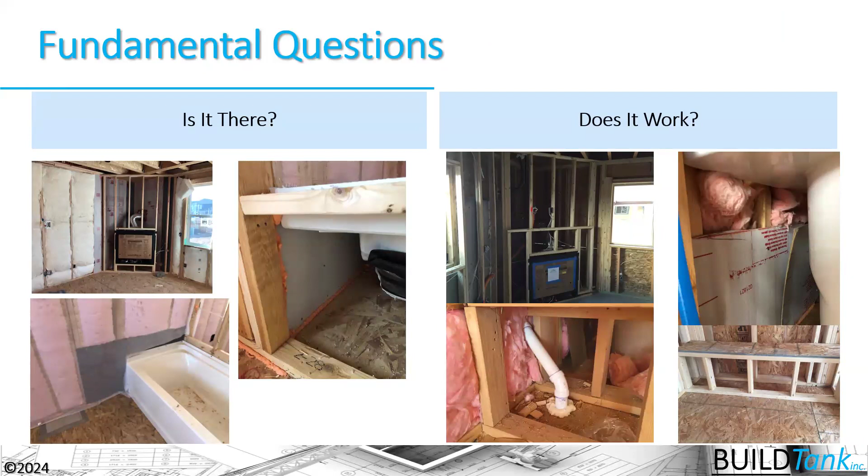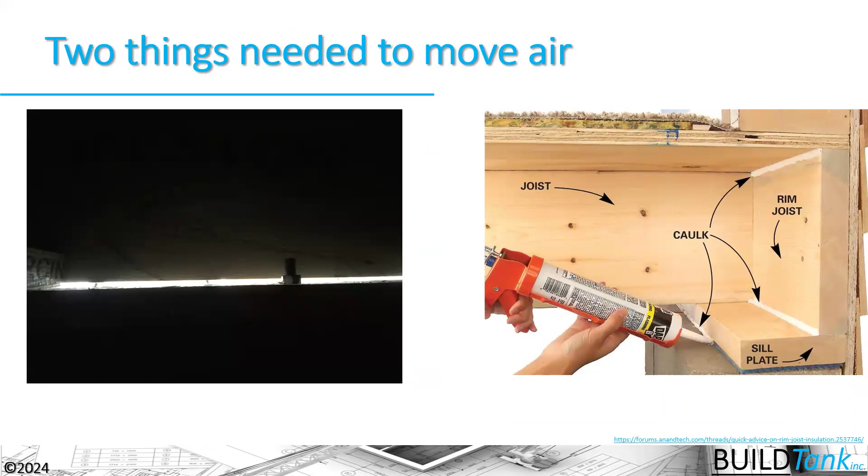So we've got some air barriers installed behind the tub, but the continuity is lacking. It's not going to work. So we're going to test our assemblies with the blower door testing here to ensure that it's going to work. And we're getting better and better at sealing up these. The code is telling us to seal this assembly in these 3 locations here to make it work. But we've got to make sure that the house is airtight to not only withstand stack effect, wind effect, but also the mechanical pressure differences that we might be introducing into our houses here.

So that means that we need to understand how air actually moves in our house. So we talked about how air is a freight train. It carries moisture, it carries pollutants, it carries energy from point A to point B. The problem is when it actually dumps its load inside of an assembly. That's when we're going to get condensation, because we have heat and moisture on a cold surface that creates condensation.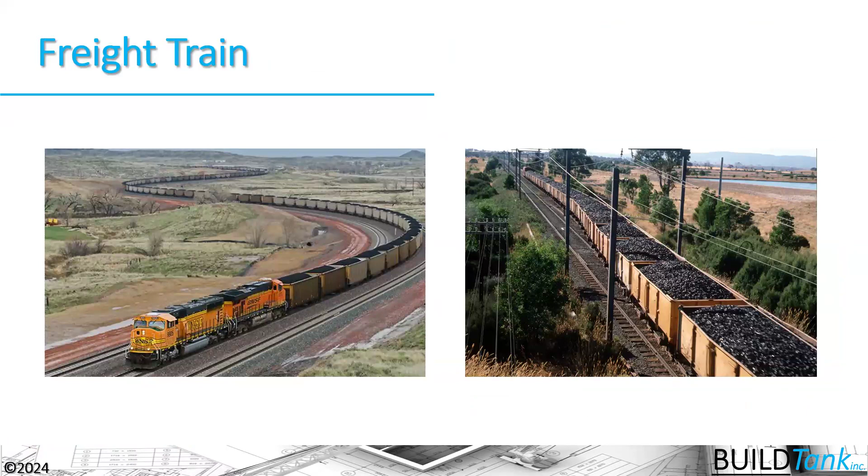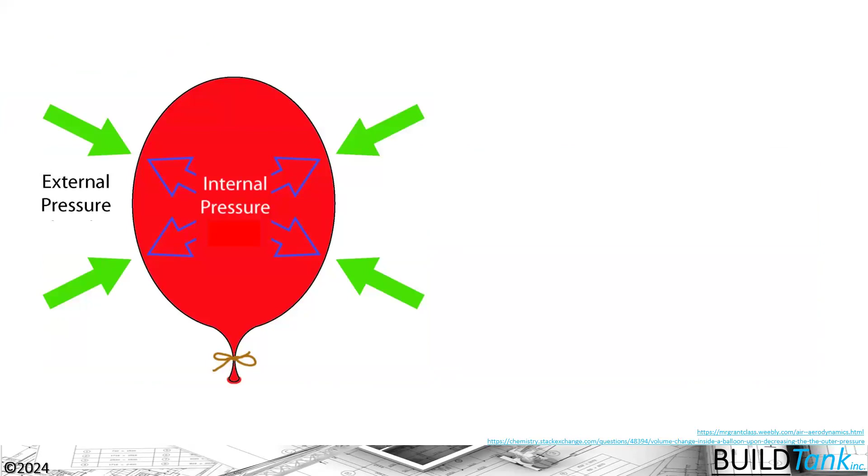So we need 2 things for air to actually move through our assemblies. We need a hole and we need a driving force. So if we think of this balloon, the rubber membrane of the balloon as our building thermal envelope, if I have an airtight building thermal envelope, there's pressure equalization on either side of the building thermal envelope. But if I untie this string and I create a hole, then I get unequal pressures and air can now move through the hole. So if I have a hole, but I don't have a pressure difference across the hole, air isn't going to move.

If I have a surface that doesn't have a pressure difference across it and I have a hole, we're not going to get air to move across it. So air's a fluid, just like moisture or water's a fluid, but I need a hole and a driving force. We can think of wind, we can think of stack effect, which is just air heating and rising, and we could think of pressure imbalances created by our HVAC systems as those driving forces.

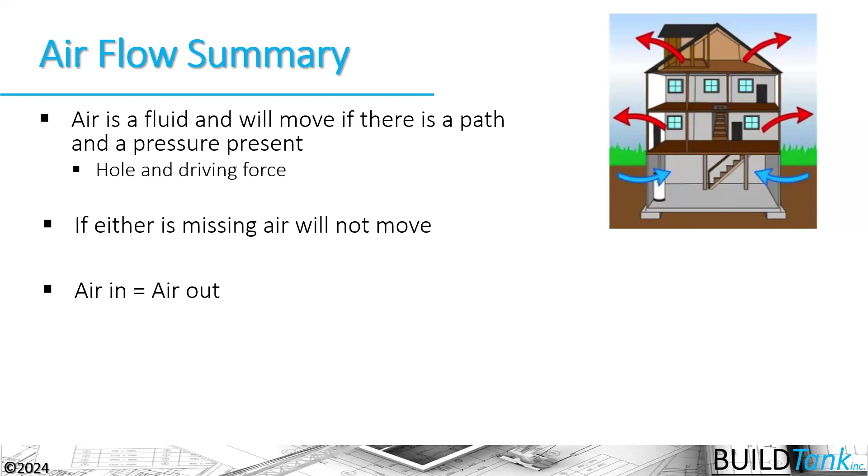So if I build it tight and the wind still blows, I'm not going to get air moving through that hole. Air in equals air out. A cubic foot of air into the house means a cubic foot of air is going to go out of the house. So ultimately, from an airflow perspective, we need to ask: can our houses be too tight?

Hopefully the idea of control and predictability is being hammered into our brains now that we are going to answer no, it can't be too tight. In fact, we're actually asking the wrong question. Our houses need to control airflow, so we're building tight. The real question is, can our houses be underventilated? And the answer is yes.

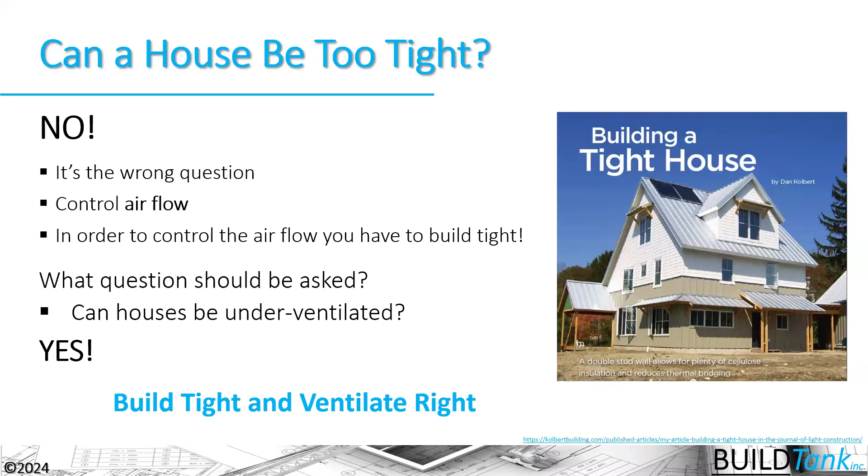We need controlled whole house mechanical ventilation because we do need to bring air into our houses for the occupants and for background moisture control, but it's got to be in a controlled and predictable manner. That's why we build our houses as tight as we possibly can, and then we introduce a hole so that we can move air into our houses in a controlled and predictable manner. It gets boiled down into this building science mantra: build tight and ventilate right.

So whole house controlled mechanical ventilation is required by the code. In the 2021 IRC, it's described a little bit differently - it's basically saying you have to provide it regardless of how airtight the house is. You can use supply, exhaust, or balanced ventilation strategies to make it happen. We do a whole session on controlled mechanical ventilation and don't have time to get into it in more depth here, so we're going to go into bulk water management.

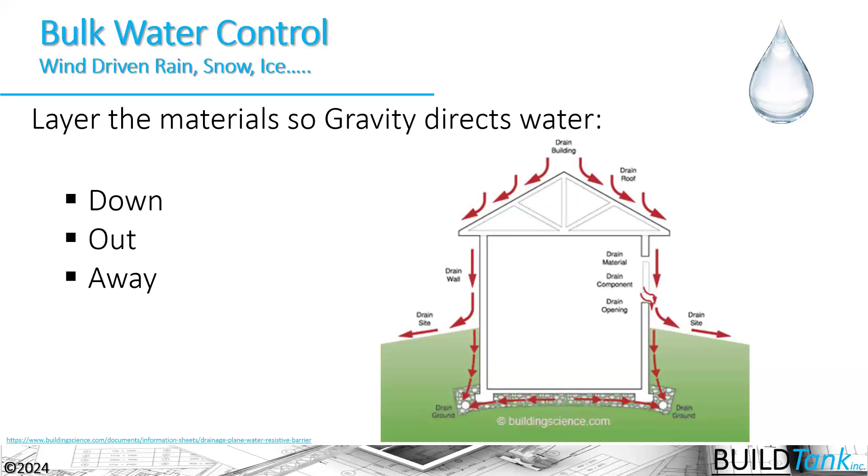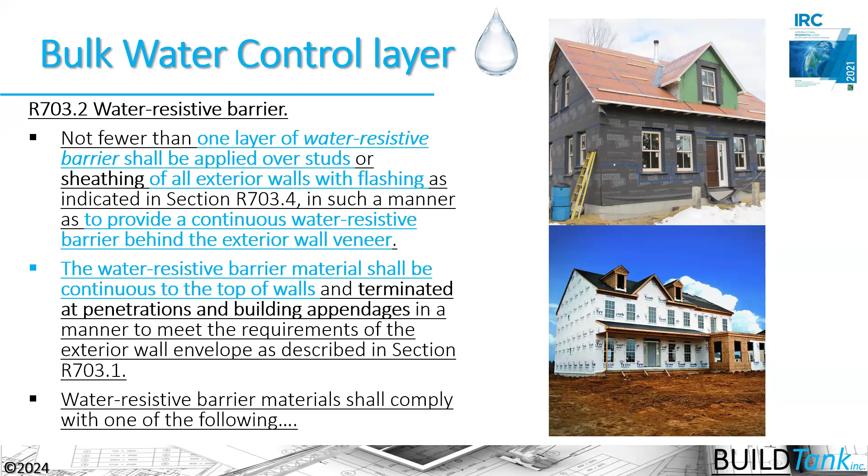The ultimate objective of bulk water management is to use gravity to ensure that water that hits the house has the ability to drain down and then ultimately away from the foundation. So we have this water control layer that we're required to put on our houses, defined in the IRC as the water-resistive barrier. It can be one layer of water resistant barrier, or it can be a couple layers - again, it's that continuity that we want to have. It's described in the R703 section of the building code.

The water resistant barrier requirements in dry climates is a little bit different than that in the moist climate zones. Especially when we're talking about stucco, we actually need two water-resistive barriers - one that's going to be a sacrificial coat to the stucco and one that's actually our water resistant barrier.

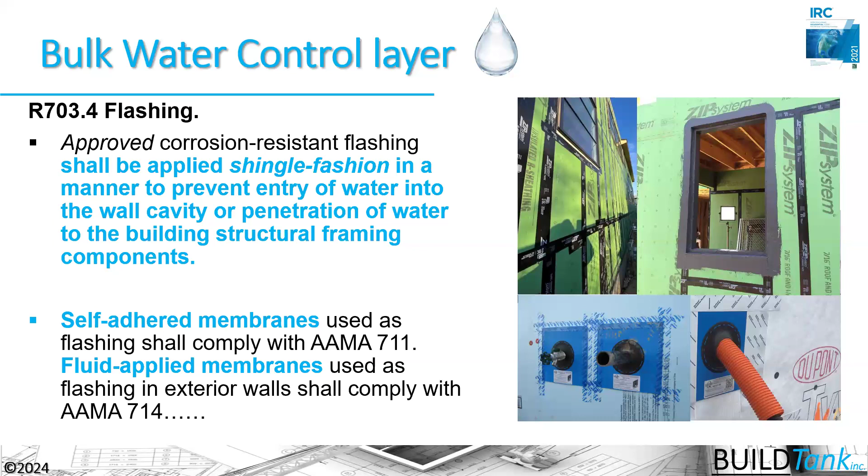The whole notion of the water resistant barrier comes from our understanding that regardless of the cladding materials we put on our houses, water's going to bypass it. It doesn't matter if I'm using lap siding, brick, or stucco - moisture is going to bypass those things. So we have to be able to drain that moisture down our wall assembly and then away from our foundation with our grading or foundation drains. Because we can't rely 100% on our cladding materials, we have to use a belt and suspenders approach, which gets into flashing details at windows and other penetrations, described in the R703.4 section of the code.

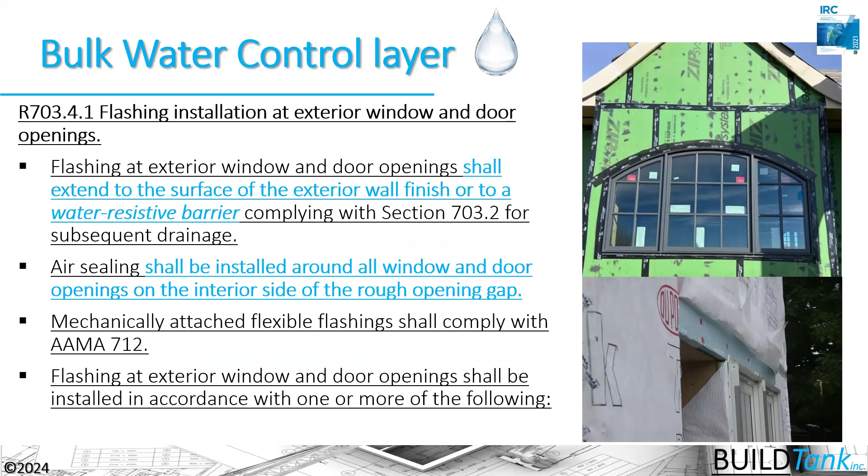Flashing techniques of exterior windows and other areas are talked about in these assemblies. Now, it's not necessarily required unless you wanted to move to a different type of vapor management that gives us more forgiving drying assemblies, like a class 2 or 3 vapor retarder. But the biggest bang we ultimately get is a vented rain screen on top of our water resistant barrier. If you do this, you're allowed to install just latex paint on top of your drywall to do the vapor retarder work, stopping vapor from moving into our assemblies by diffusion, because we're allowing greater drying potential of these assemblies.

So different types of rain screens are required, and unfortunately in the IRC, they don't define the gap size that's needed. It turns out from a building science investigation perspective, we only need about 3/16 to 3/8 of a gap, roughly in that range. These types of materials are providing enough gap so that moisture in its bulk stage can drain down there. It's not going to get enough hydrostatic pressure to hold it in place. It's going to be able to drain freely down behind the siding.

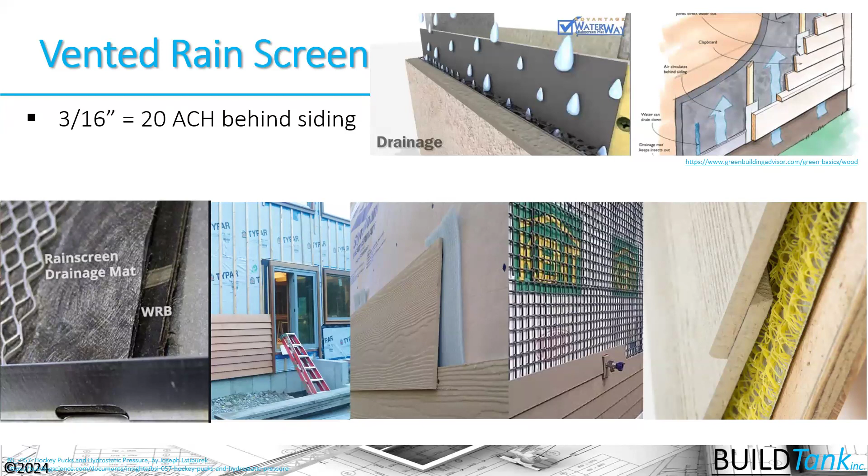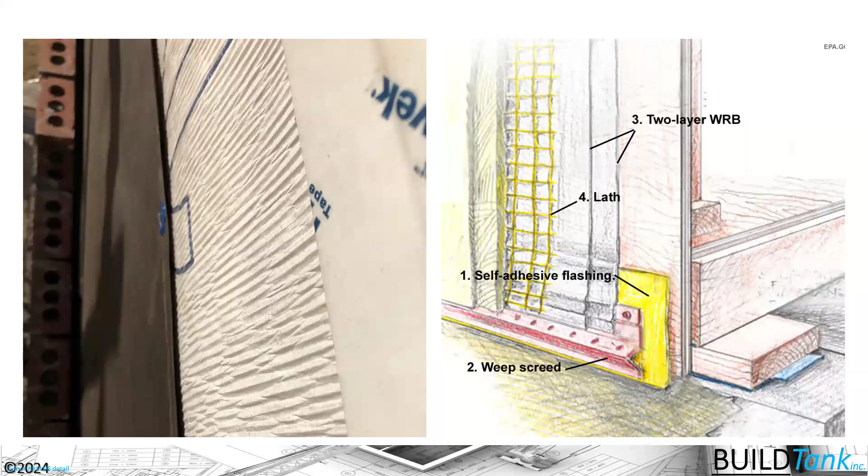Again, siding is not going to protect our assemblies completely. It does protect them to some extent, but water will bypass our siding materials. Therefore, we need these layers of water resistant barriers to drain behind here. In these two cases, we've got the sacrificial coat with the tar paper on top of the drain wrap, in this case the Tyvek brand drain wrap, or if we have stucco, that's two layers of WRB, where the layer adjacent to the stucco is actually a sacrificial coat in our assemblies.

So ultimately, when we're talking about water and bulk water management for our homes, we're talking about this hygrothermal balance, where wetting mechanisms are equal to drying mechanisms, so that we have this balanced equation, so that we're not trapping moisture and driving it into our assemblies. We're allowing it to evaporate, dry, or drain down and out.

So in order to ultimately gain these building science principles and integrate them into our houses, we really need to think about integrated design processes. Integrated design processes help us further define the project, not only from the IECC or energy performance perspective and how we're going to get control and predictability, but also from our long-term durability perspective, from the cost of ownership perspective. All of these things can be defined into it. These building science principles that are associated into the codes through understanding the control layers we're building into our houses helps us in this integrated design process and integrating it into the codes as well.

So we're able to share responsibilities by bringing the right team together. It's not only the architect's job, but if we bring the architect, the builder, trade partners, and energy professionals together, we can get a system that's going to work. And you can ultimately create building systems that are repeatable. You put a different cladding on that house, but the base core building thermal envelope is the same from house to house to house because it performs, it works.

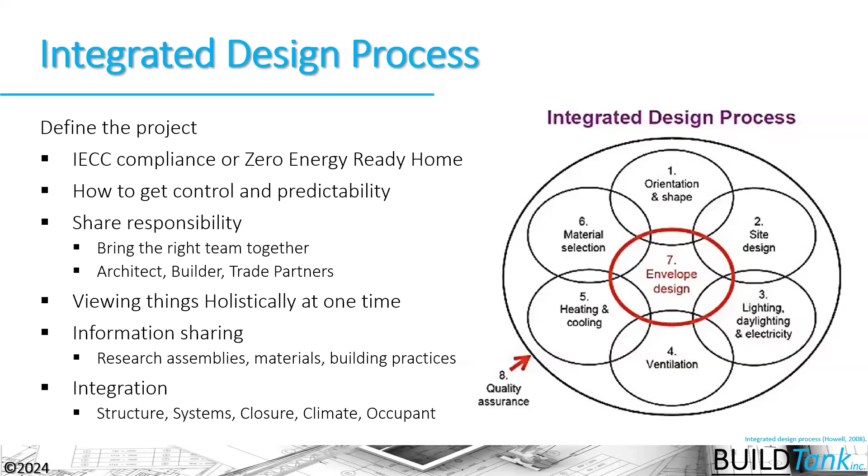So to conclude here, we ran through a lot of material, but applied building science involves that systematic approach. Our ultimate gain is gaining control and predictability of airflow, moisture flow, and thermal flow in our houses. How do we do that? We understand the science of how we are creating bulk water management, air control in our houses, vapor control in our houses, and ultimately thermal control in our houses.

Again, the code kind of looks at it in the opposite direction, but the thing that destroys houses from a building science perspective is moisture. So bulk water is key, is the first one there. Air control, because air carries moisture and pollutants, is second. Vapor control is third from a building science perspective, because again it's dealing with moisture. And then fourth on our list is the thermal control. But again, we're integrating these things with customers' expectations, and thermal control is key to a customer's expectations.

So ultimately, it goes back to the systems approach and the idea of synergy, where two or more things are coming together to achieve things we couldn't achieve before, like that comfort expectation a client might have. So the integrated design process is key. Design and build for comfort, durability, efficiency, and now resiliency as well.